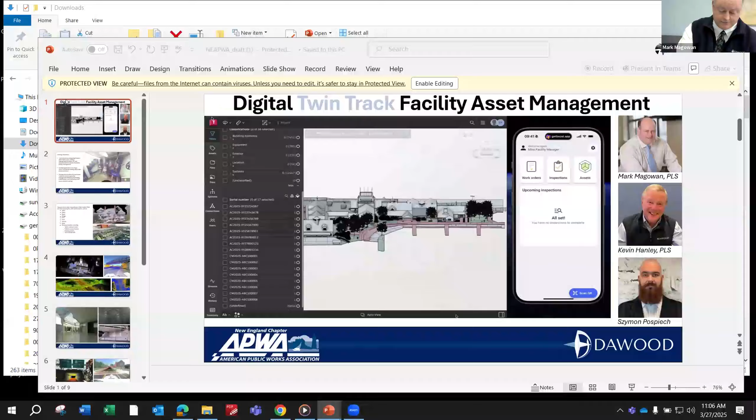Thanks a lot, guys. Yes, good morning. I am Mark Magowan from Dawood, and first off, we would like to thank the New England chapter of the APWA for allowing us to make this presentation. Just a quick biography of Dawood Engineering: Dawood Engineering was founded in 1992 and spans over 30 years of growth and achievements. Dawood is a multidisciplinary professional consulting firm specializing in surveying and mapping, GIS services, BIM, VDC services, site and civil structural engineering, environmental services, geotechnical engineering, and transportation, wastewater, and construction management. Our New England office is located in Braintree, Mass, and Dawood Europe is located in Poland.

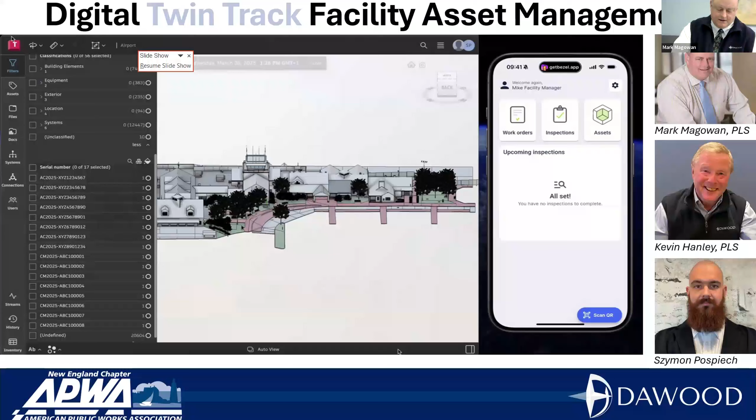This presentation will highlight use cases where facility digital twin through Dawood's native Twin Track mobile application can reduce inspection time by 90%. In a variety of markets, including New England wastewater facilities and transportation infrastructure, TwinTrack allows owners, plant managers, and process engineers to seamlessly monitor assets and improve decision-making. TwinTrack also provides public works personnel with access to technical documentation, operational guides, and warranty records of equipment using their mobile phone app. Elements are tagged with QR codes, enabling rapid information access.

This allows for data exchange between the mobile app and the digital twin using the Tandem API, making it the single source of truth. On-site engineers access information on the go during daily inspections and send inspection data to the digital twin. This helps management respond to events in real time and reduce incidents. Day-to-day facility users create and manage work orders remotely in the web portal and assign tasks to field staff working through the mobile app.

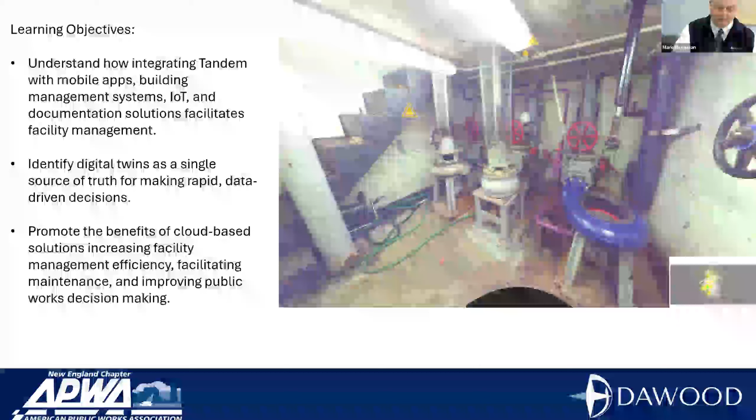The learning objectives of this presentation are to understand how integrating Tandem with mobile apps, building management systems, and documentation solutions facilitates facility management, identify digital twins as a single source of truth for making rapid, data-driven decisions, and to promote the benefits of cloud-based solutions, increasing facility management efficiency, facilitating maintenance, and improving public works decision-making.

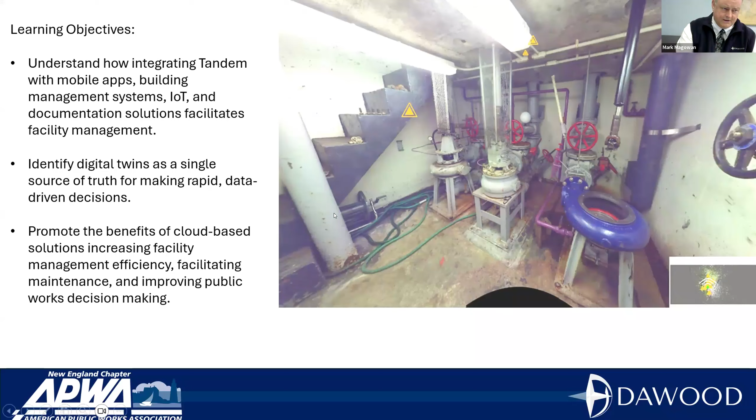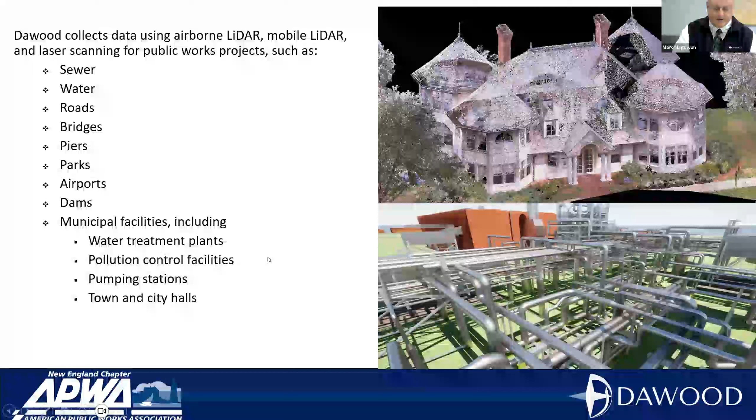Our methods of collecting data: Dawood collects data using airborne LiDAR, mobile LiDAR, and laser scanning for public works projects such as sewer, water, roads, bridges, piers, parks, airports, dams, and municipal facilities, including water treatment plants, pollution control facilities, pumping stations, and town and city halls.

Now this is a rare occurrence where an individual with 47 years experience is introducing another surveyor with 53 years of experience. That's a total of 100 years experience. So I'm handing this off to Kevin Hanley.

Thanks, Mark. It's hard to realize that college graduation was 53 years ago. And in those few short years, I've seen a lot of technology introduced to surveying and mapping. I've even been involved in scribing of assessors maps long ago.

But do you remember when CAD was introduced? We had the ability to draw lines between points. Remember when GPS was introduced? Huge, big receiver, long observation sessions. Computers back then, huge big boxes taking up desktops. And now your handheld smartphone can do all of that. And the mobile solution is the key to our TwinTrack solution.

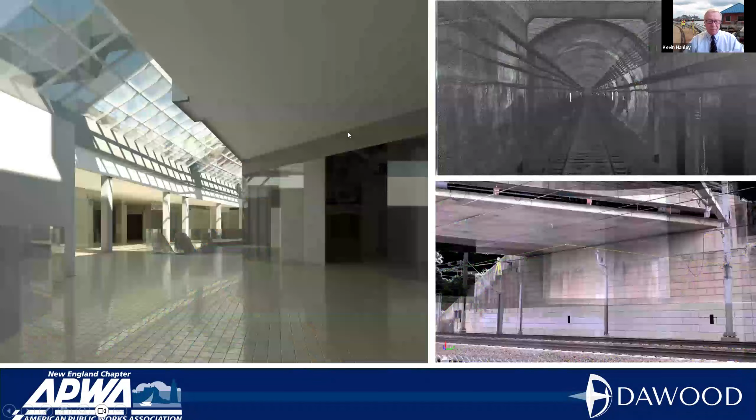So it all begins with points. Years ago, it was single points, drawing lines between them. Now it's millions of points that are collected with ease. With laser scanners and mobile LiDAR systems, we're collecting anywhere from 500,000 to 1 million points a second.

It allows us to do fly-throughs, video through the point cloud, video through colorized point clouds, so you can essentially do desktop inspections. And the ability to do colorized point clouds, the bottom right, this was a quote unquote simple survey.

We needed to locate tracks and the bridge abutments remotely without going on the railroad. So the picture you see is a colorized point cloud. So we extracted the rails and the abutment, but once the client saw these images, he needed more information. So we went from a simple survey to a 3D drawing of the bridge and the abutments.

And we provided clearances for the wires and the bridge to the rails. The image on the left is a 3D model, a Revit model of a supermarket in Poland. So it takes millions of points, colorized images, and creates these 3D models.

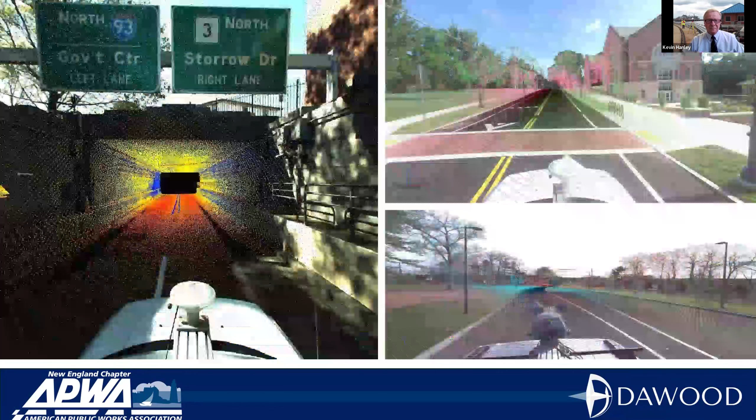So how do you track assets and their maintenance? What's tracked from a public works perspective? In these three simple images that contain the point cloud and the imagery, there's a number of items that you probably track, maintain, and assess the quality of throughout the course of each day.

Signs, the height of them, the location of them, the reflective quality of them, detectable warning strips or detectable warning pads at pedestrian crossings, and what condition they're in. Lights, lampposts, trees, signs.

How do you track them? Even this morning, driving into the office, the first intersection I came to, I noticed that the traffic light pole had been replaced and was taller than the other traffic light poles. How is that managed? How is that tracked? How does one know within the Public Works Department when it was installed, and the material, etc.?

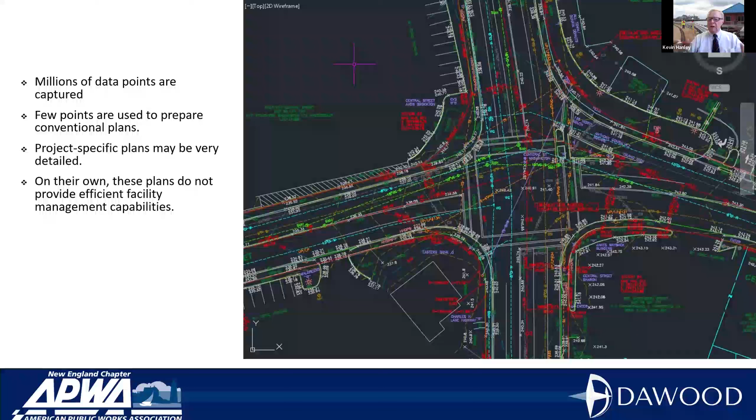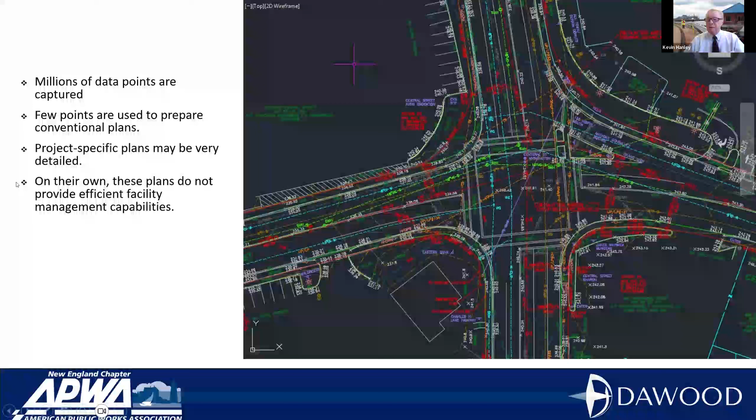So we collect millions of points, but few are generally used to prepare plans that engineers and public works officials use throughout each day. They're usually project-specific plans that may be very detailed, as you can see with the image on the right, but on their own, these plans do not provide efficient management capabilities.

So here we are with the technologies that are available today. We've gone from points to digital twins. We started with points and point codes, simple data about the point - the coordinates, the elevation, the description, and maybe even a reference number. Then we've gone to GIS, and then with scanning and LiDAR, we've jumped to the next phase of data gathering. We can do fly-throughs, 3D models, BIM models, and digital twins.

And the digital twin is a holistic view of a facility. It provides value-added solutions, and most importantly, it's geospatially referenced data. It provides cutting-edge facility management capability using twin-track data management.

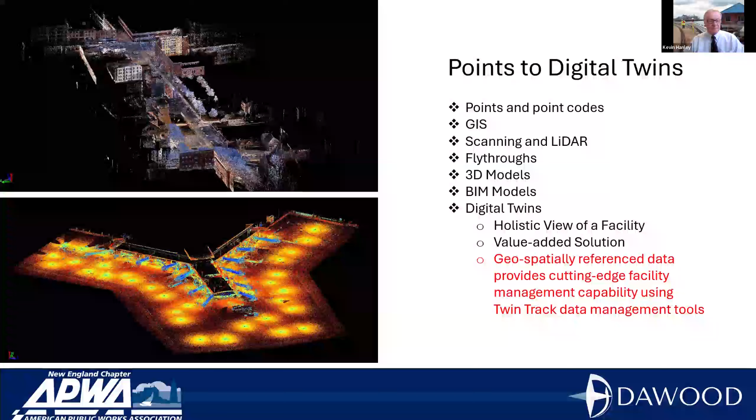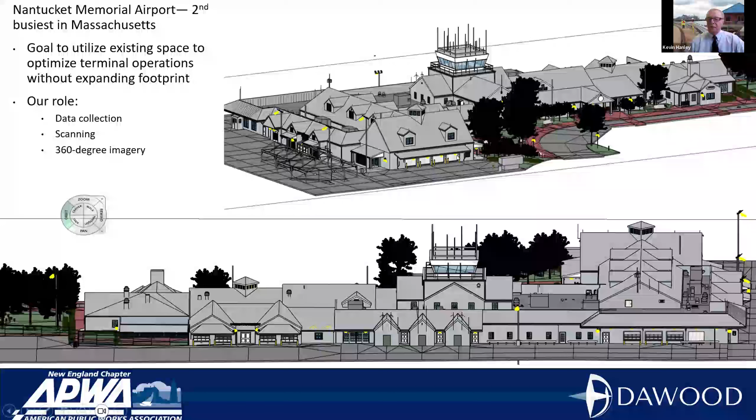So one of the projects that Szymon is going to concentrate on today is a typical municipal airport. And I'll hand it over to Szymon now to make his presentation on twin-track. Thank you, Kevin.

So today, let me explore a little bit of how digital twins are transforming facility management.

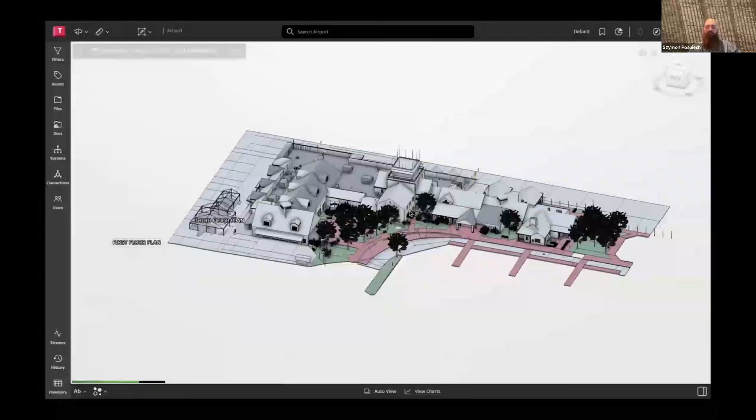As Kevin mentioned, it all starts with collecting data. Once the data is collected and we've got a BIM model, we can then import this BIM model into Autodesk Tandem software, which behaves as a host for our digital twin.

Let me tell you a little bit about what that digital twin really is. It is a dynamic virtual representation of an asset, process, or system. It's not just a static model. It's constantly updated with real-time data, enabling you to monitor, analyze, and optimize your assets.

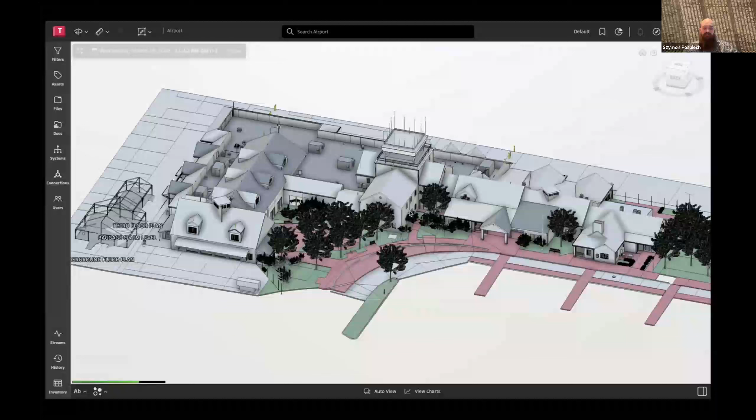In facility management, digital twins provide a centralized digital view of your facilities, allowing you to access critical information, streamline operations, and make data-driven decisions. They also integrate data from various sources, such as IoT sensors, inspections, work orders, to give you a holistic view of your facility.

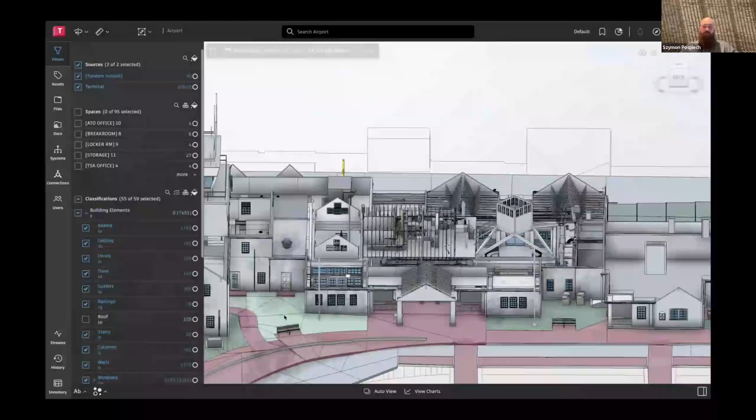In this example, I'll show you how easy it is to manage your facility. We can filter out any of the elements of the building to easily remove any plantings in front of it, if we need to access air conditioners or fuse boxes on the walls. We can filter out ceilings, roofs to preview the beams or preview the systems inside, like plumbing or HVAC equipment. And we've got access to all the assets found in a facility.

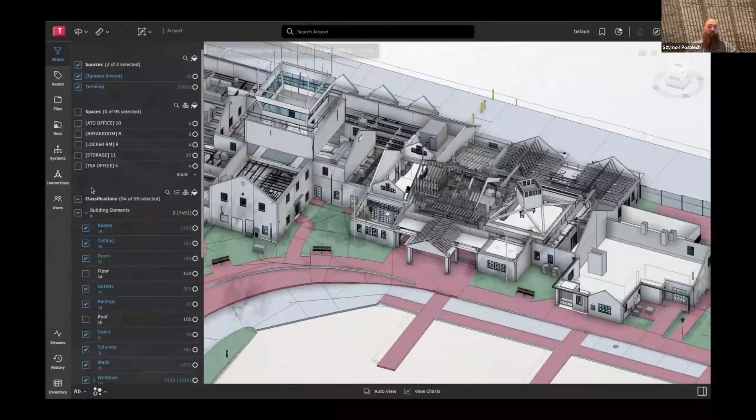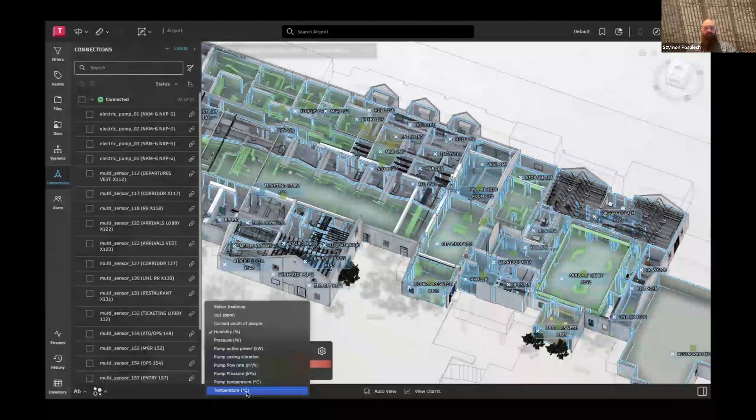We also got access to all the spaces in our facility, so we can preview each of the rooms, each of the spaces. And by having this real-time connection by the IoT sensors, we got access to a lot of measurements. We've got sensors feeding data about CO2 levels, count of people in the room, humidity, pressure, and temperature data, and we can easily visualize these values as heat maps in our facility.

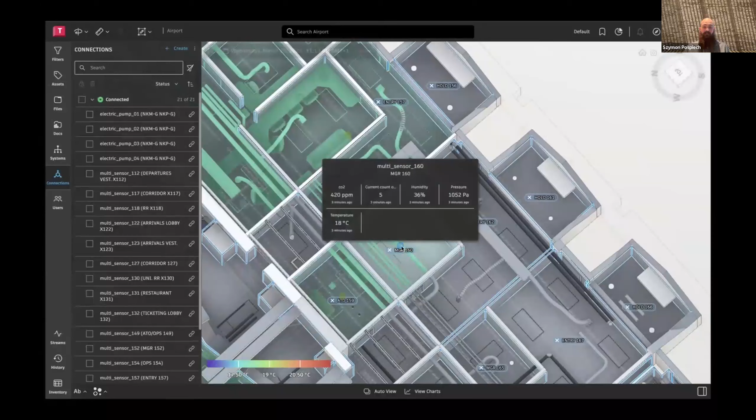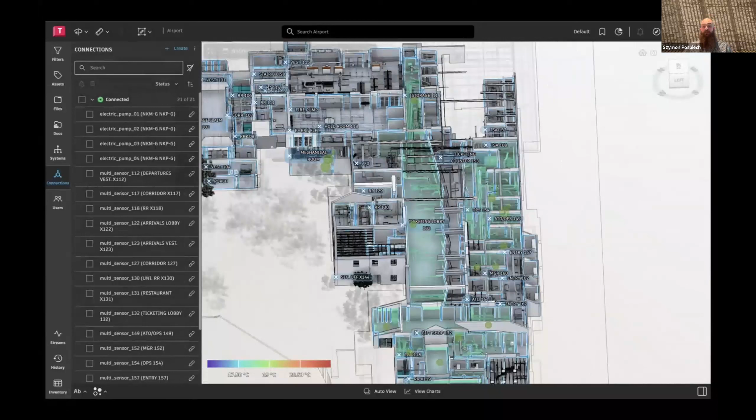If it is a bigger facility, we can easily preview it in real time on our desktop in a virtual environment. This way we can analyze how the temperature is flowing through the rooms, how many people are in each of the rooms, and we can make data-driven decisions and optimizations to reduce energy costs or optimize our facility for foot traffic, for example.

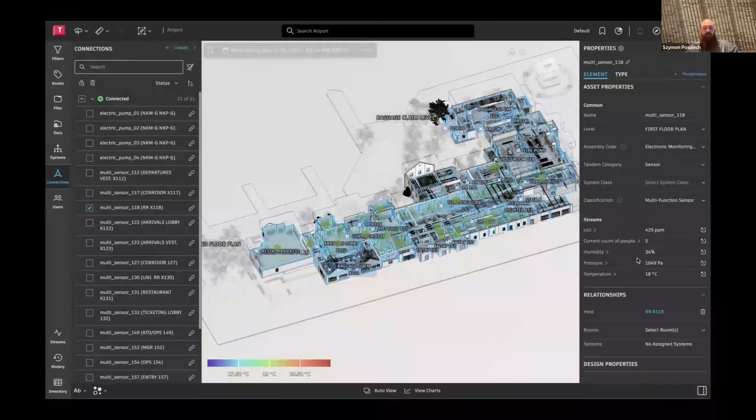Facility management comes with a unique set of challenges. For example, accessing accurate and up-to-date information about the assets can be time-consuming, especially in a large facility. Managing work orders often involves multiple stakeholders, which can lead to communication gaps or delays. And inspections, while critical for maintaining equipment, can be inefficient and prone to errors when done manually.

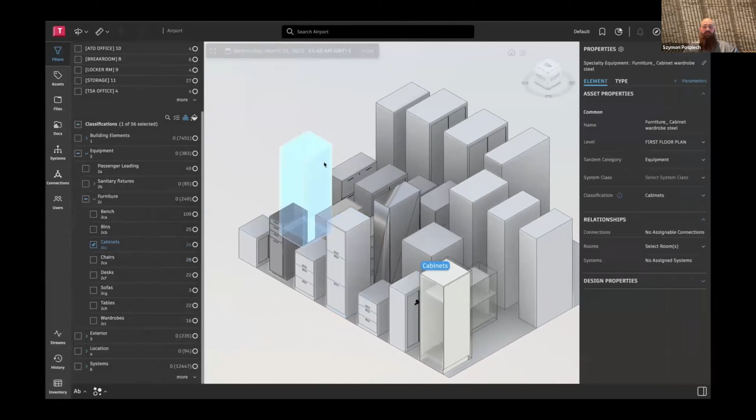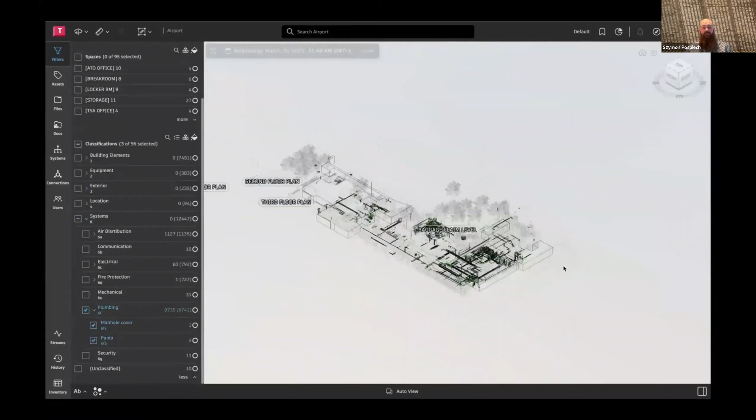Here we can see how easy it is to filter out furniture assets in our facility. We can cluster the cabinets to easier count them or access any information assigned against these elements. The digital twin technology addresses these challenges by providing a centralized platform where all asset-related data is stored and visualized. This allows facility managers to access information quickly, streamline workflows, and ensure accountability across teams.

In this example, we are trying to access pumps found in a machine room, and we want to see the information assigned against the pump. We can see by who it was installed, the manufacturer, serial numbers, when the warranty is expiring. We've got all the information about the upcoming inspections.

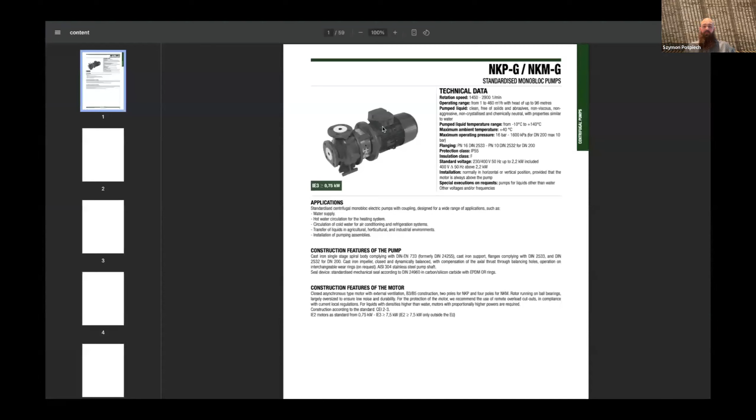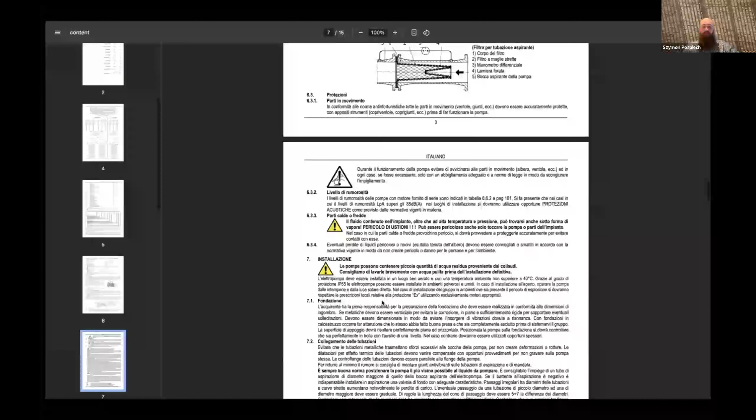We've got details about the open work order, but also we've got all documentation linked to it, so technical documents, operational guides, or a warranty card, which is really easy to retrieve by the facility management team. And if something is happening with the pump, they can easily preview the details.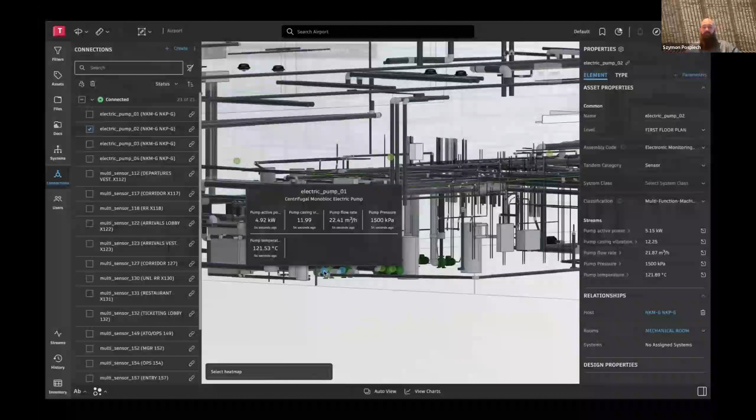Apart from the static data assigned against the elements, we've got also access to the real-time data incoming from the IoT sensors. So we can preview, for example, the active power of the pump, the casing vibration, the flow rate, the temperature or pressure. This allows us to monitor the performance of our assets in real time.

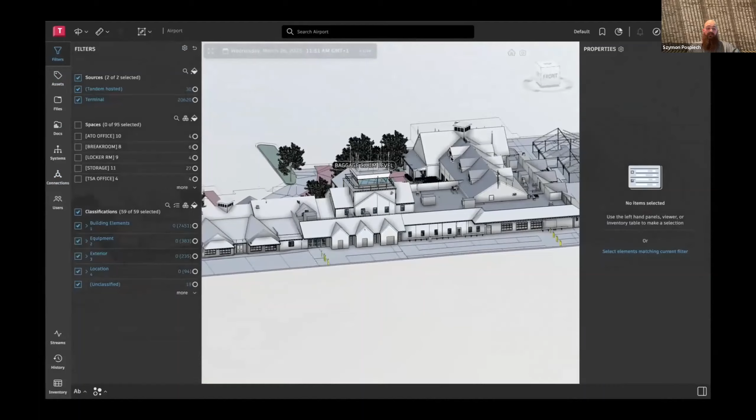In this presentation, I really want to focus on three main use cases: accessing asset information, managing work orders, and performing inspections. This hopefully will demonstrate how digital twins can simplify and improve these processes.

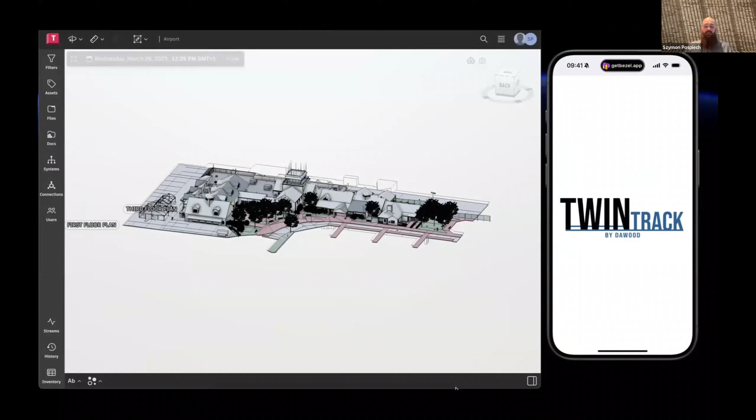On the left-hand side, we've got the digital twin in Autodesk Tandem, and on the right-hand side, we've got the TwinTrack application, which is a native mobile application integrated with a digital twin model.

So let's start off by accessing the asset information. Imagine you are a maintenance team member in a facility who needs to check details about a specific air conditioner unit in one of the rooms.

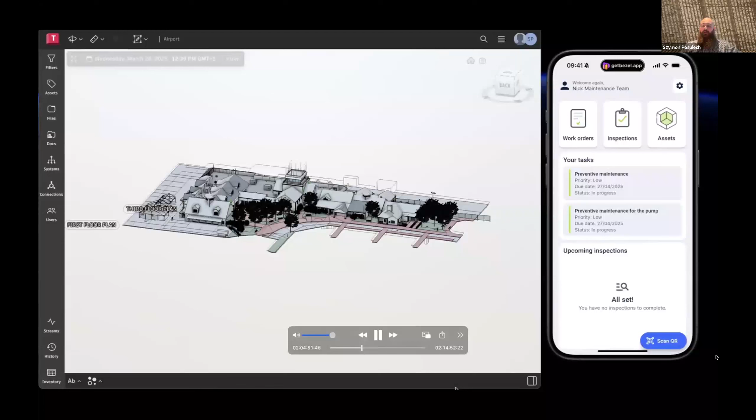By pressing scan QR code in the app, we're getting access to the camera, and we can scan the QR code located on the asset. By that, we are pulling all the information found in a digital twin while being on site through our mobile phone. So we've got access to all the documentation, operational, technical guides.

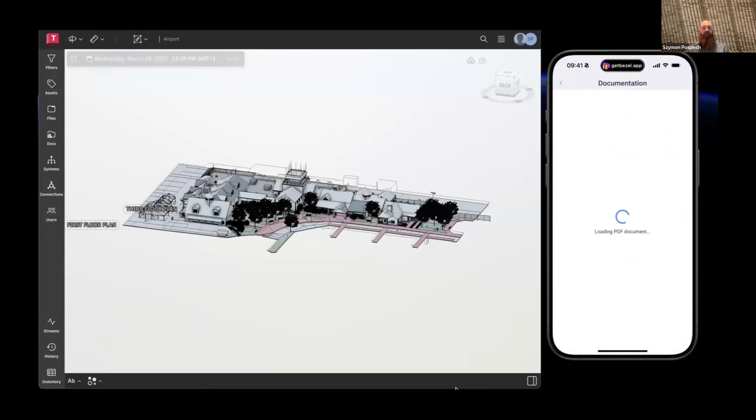We've got access to all the information which is also found in a digital twin, but also we've got access to inspections history. We can preview when the inspection was done, and we can also see the work orders.

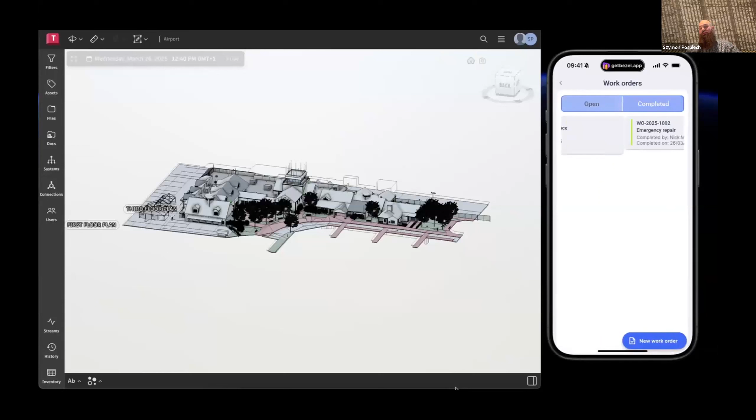We can preview the history of the work orders, check the tasks and what was done with them in the past, and see if there is an open work order assigned against the asset. And we can preview all this information through the mobile phone.

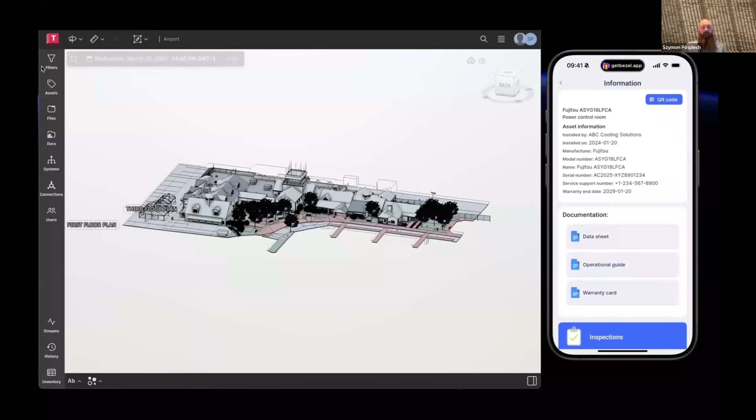I also want to show you that all this information available on a mobile phone is being streamlined from the digital twin, which behaves as a centralized repository for all this information.

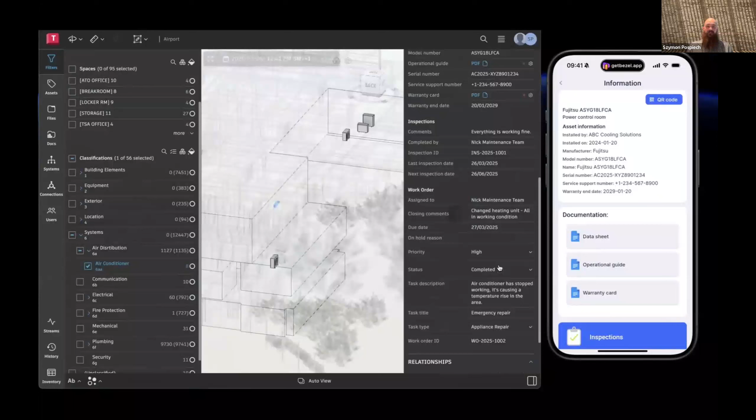So when the facility management team wants to update any data in a digital twin, they can easily navigate to the same asset, located in the same room but in a virtual replica, and update these details through the digital twin interface. Once they upload new technical documents or a new supplier warranty card, this information is accessible through the mobile application by the on-site staff.

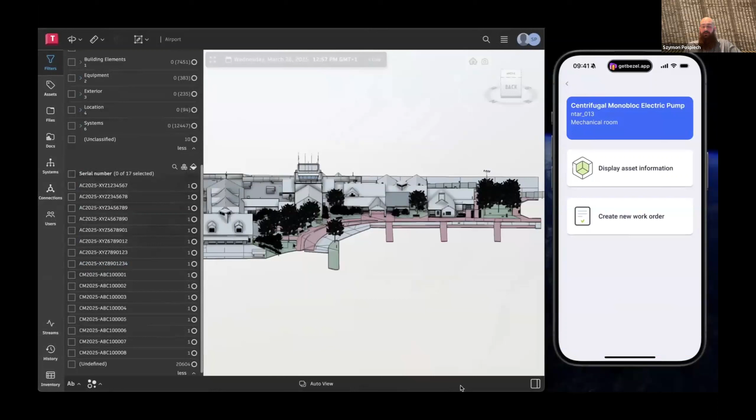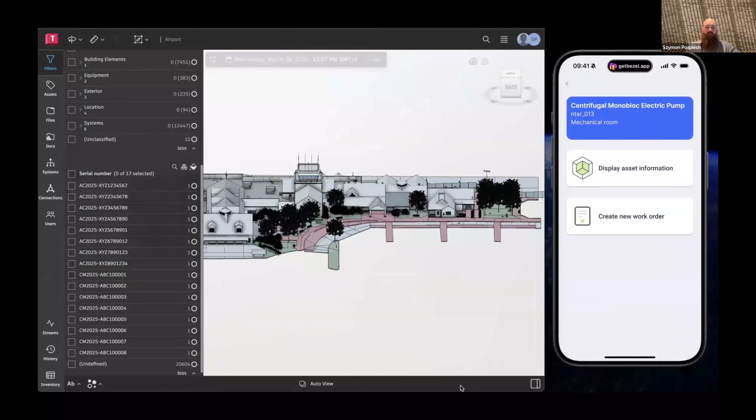Now let's move into the work orders process. Let's imagine you are identifying an issue with a pump in the mechanical room, and the process is the same as for accessing asset information. We scan the QR code located on the pump, which pulls up the information about the pump on a mobile phone, and we can create a work order.

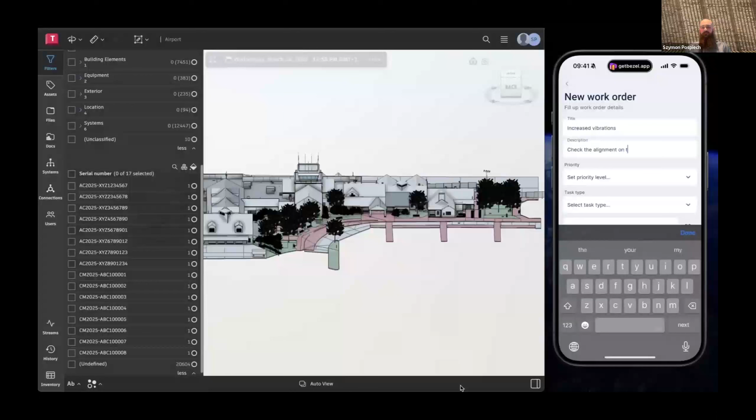Let's say we identified increased vibration on the casing of our pump. We can add a title and a description of the work order to make it more informative, set the priority of the task, specify the task type to allow easier grouping and searching later on, and specify a due date for this work order.

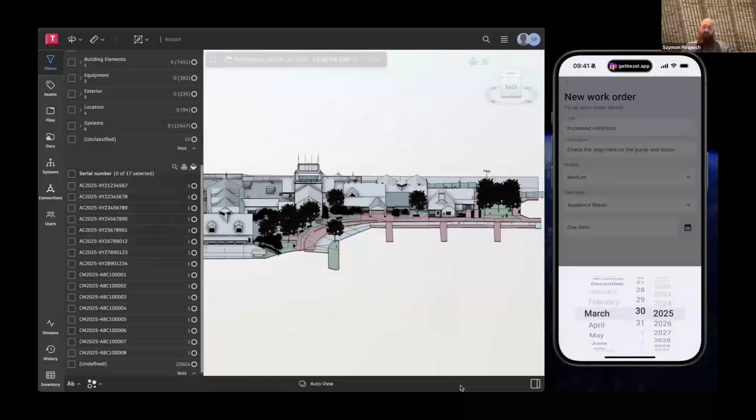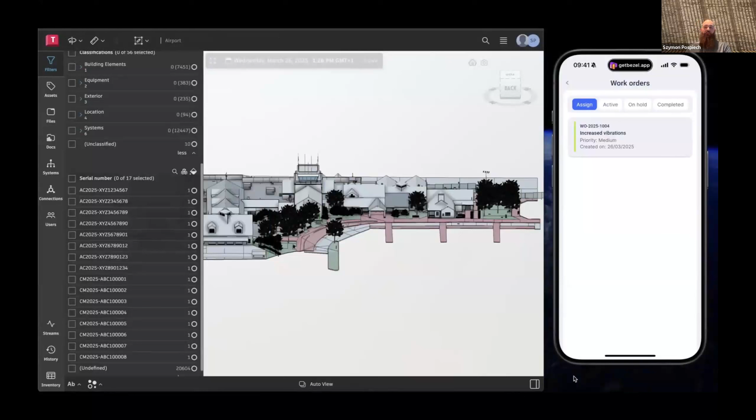When it is submitted, we get a trace of it in the application, and the facility manager also gets a notification with all the details we just supplied. They can log in and preview all the work orders for their facility, see the history, see the completed, active, and on-hold ones, and action the ones pending to be assigned.

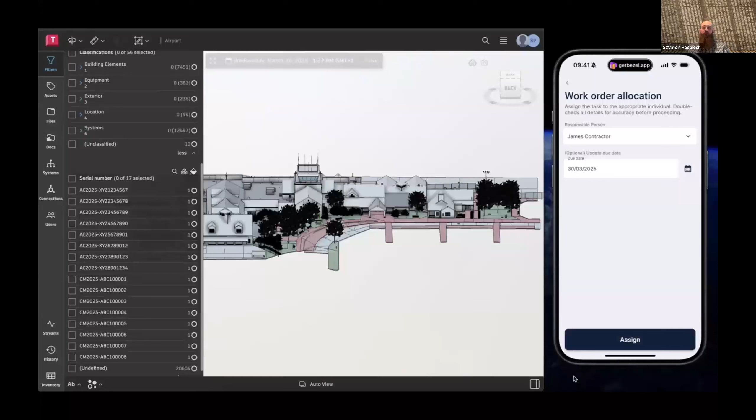Once they preview the details, they can allocate the task to the on-site facility maintenance team or to third-party contractors. If they select a third-party contractor, we limit their access to the data, only giving them access to the work order details and the asset to which this work order relates. This way we ensure data security.

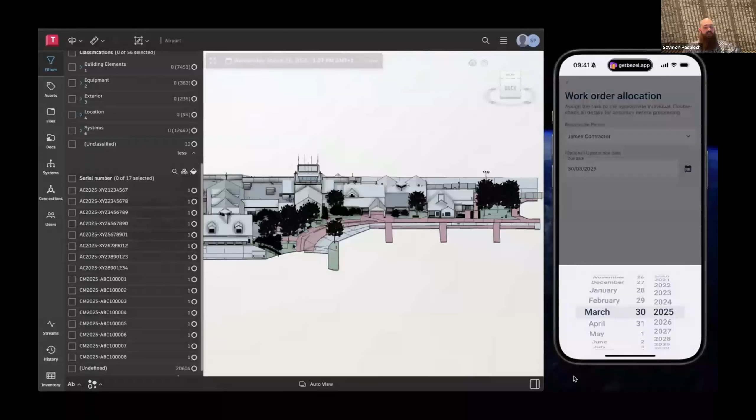The facility manager can also update the work order details and due date and assign the task. At this point, the contractor gets a notification that a new work order was assigned to them.

But we can also preview in the digital twin that this information was assigned against the pump in the mechanical room. So we get all this information stored in our centralized repository, in our model.

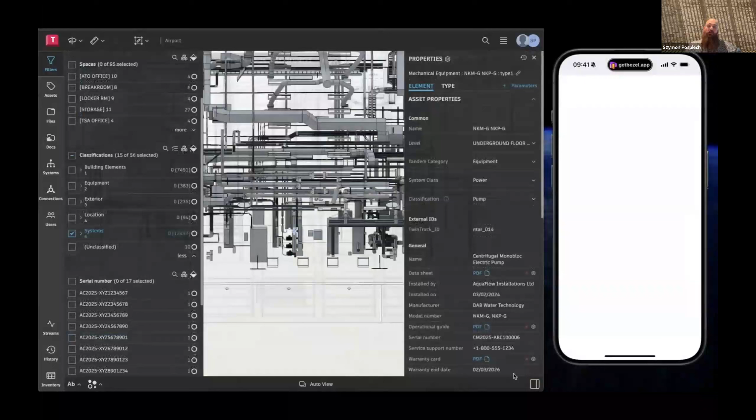So when the contractor goes into the application and navigates to the assigned work order, he can preview the exact information just for this one asset and access any technical documentation if needed, or operational guides needed for him to perform the repair.

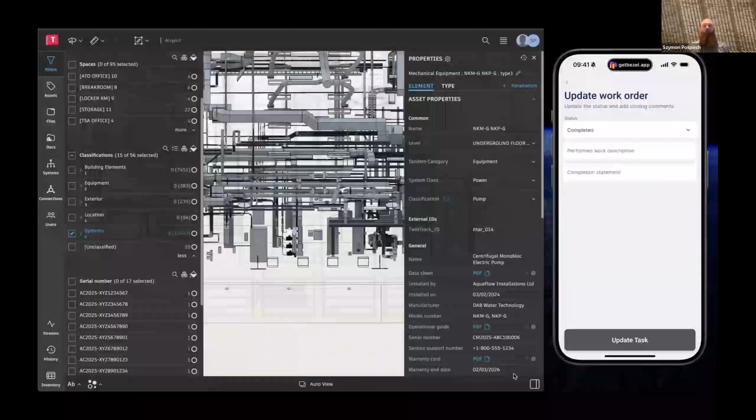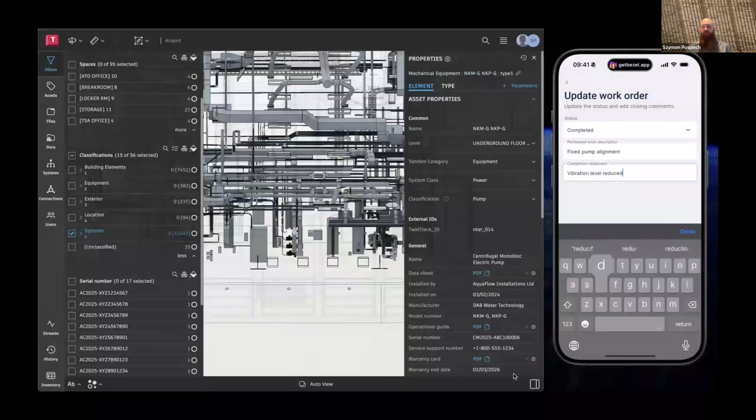Once the work is done, they just need to specify what kind of work was performed during the repair and add the completion statement. This allows both the requester of the work order and the facility manager to stay up to date with all the information about what was done to one of our assets. When the task is updated, they also get a notification, keeping them in the loop with all work progressing in their facility.

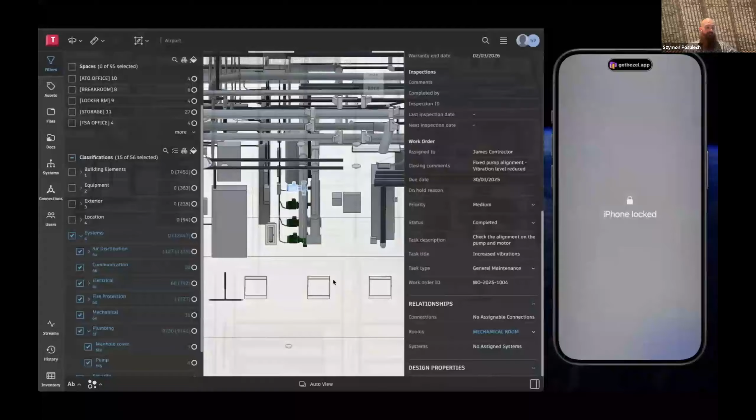The information is also updated in the digital twin, allowing them to trace any work performed on site. This provides a holistic view of their facility and also gives them the chance to track recurring issues, identify patterns, or optimize maintenance strategies.

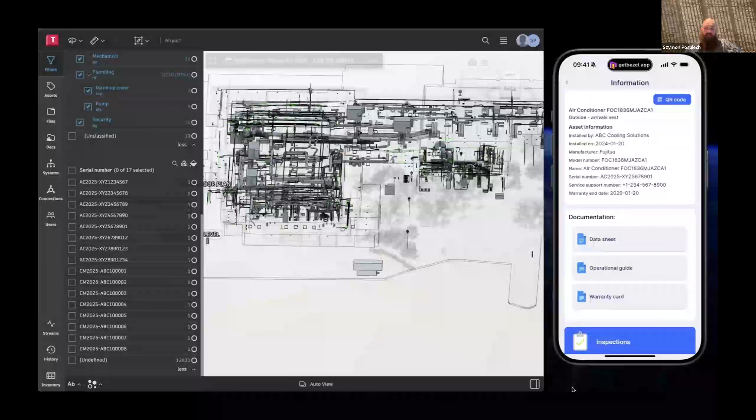Finally, let's move on to quick inspections, which can be streamlined using digital twin technology. Inspections are a critical part of facility management, allowing you to regularly check your equipment and identify potential issues early on. To schedule an inspection, the person on site can navigate to inspections.

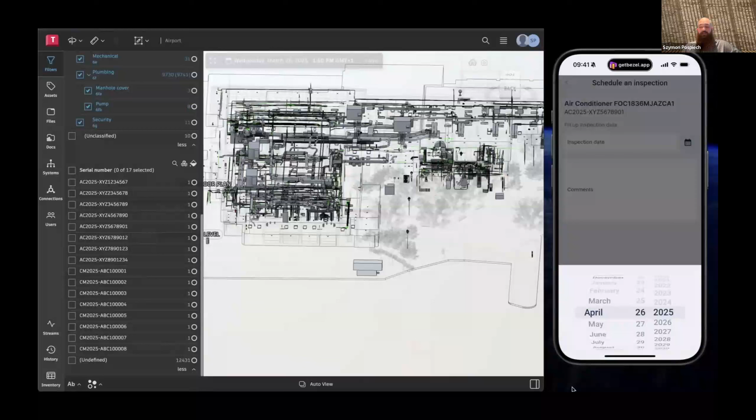They are able to preview the history of previous inspections, and they can schedule a new one by supplying a date for the inspection and adding any necessary comments. For this example, it is just a regular checkup.

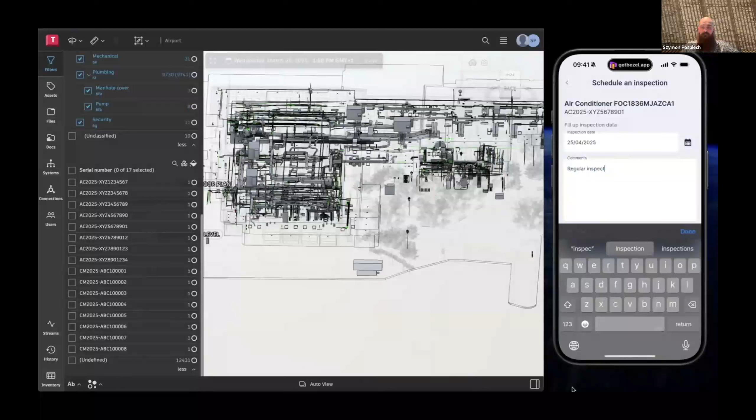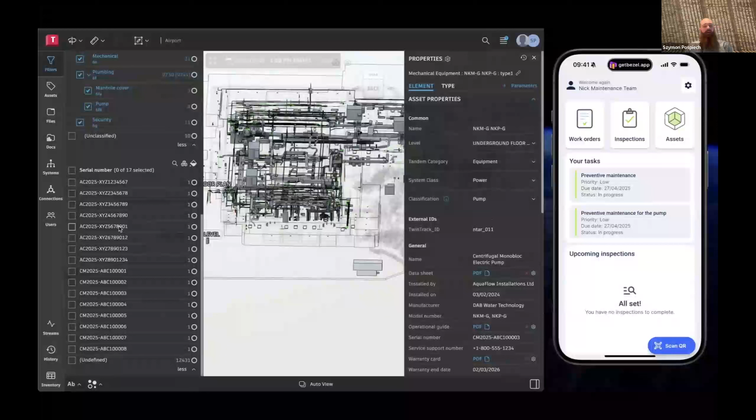Once they schedule the inspection, the details of it are also submitted against the element in the digital twin. So by searching the element through the serial number in this example, we can see that the information about the upcoming inspection will appear against the asset.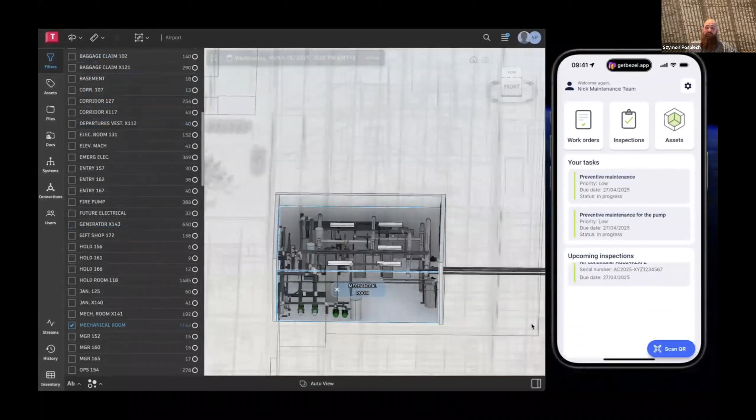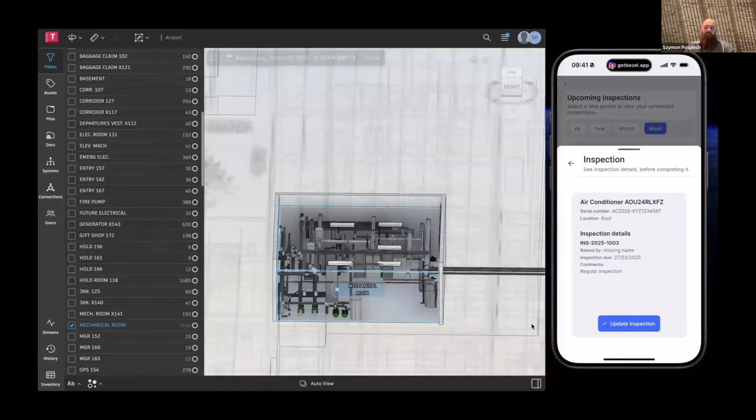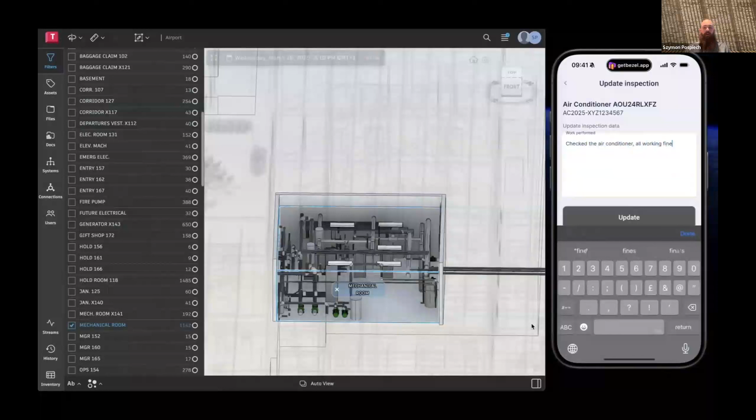Once the inspection is scheduled, the maintenance and facility management team can see the whole list of upcoming inspections for a year, an upcoming month, or a week. Once the inspection is due for the element, they can perform it, providing the inspection details and the work performed, which is also transferred to a digital twin so the facility manager is kept in the loop. They can schedule a new one if needed, or just navigate back to the home screen.

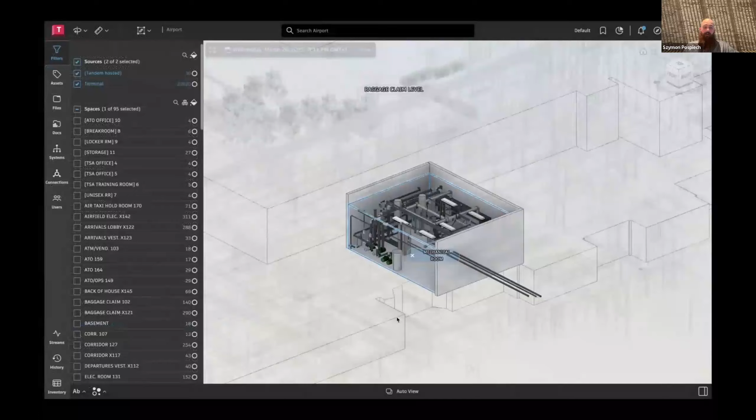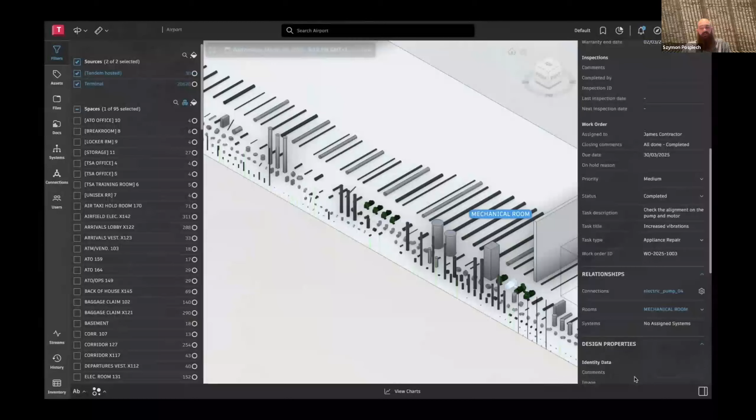This allows all the information to be kept in a digital twin, and it also speeds up the time needed for performing inspections and work orders. Everything is centralized in a digital twin, and the digital twin changes how we manage our facilities. It helps us improve paper-based processes and data collection by giving us a virtual repository to store all the static and dynamic data about our assets.

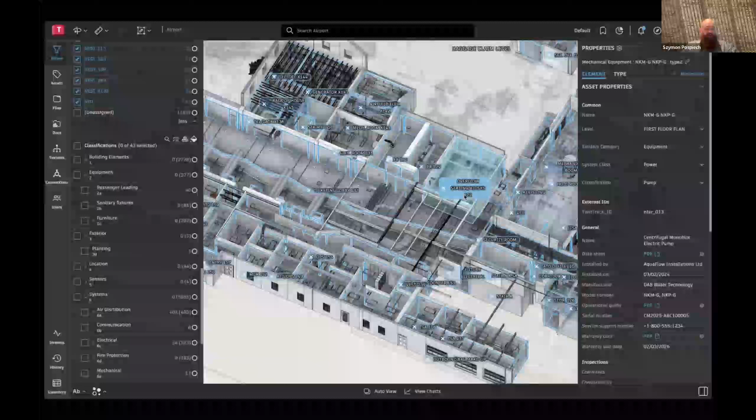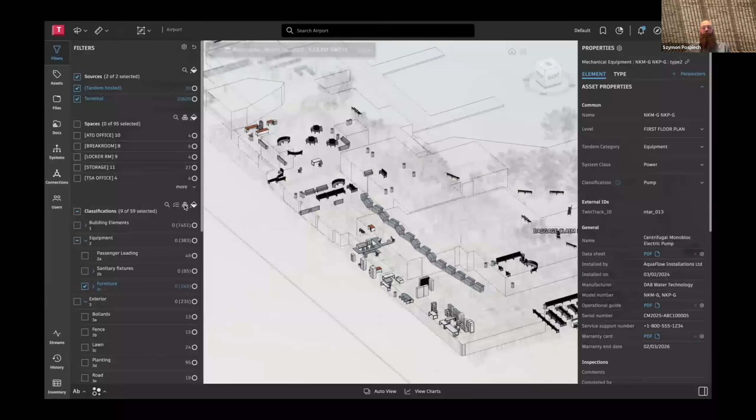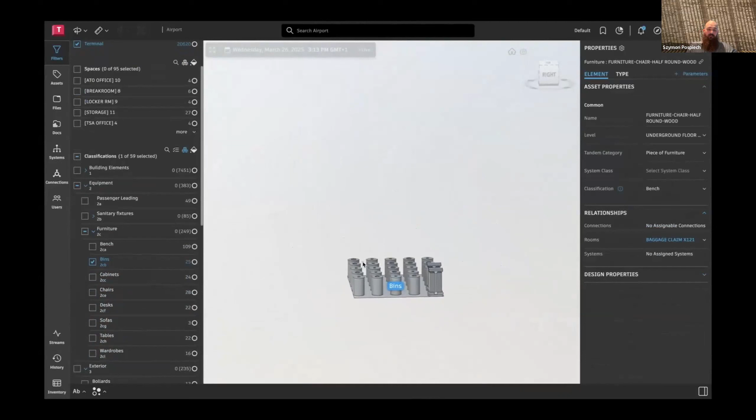I want to give you two examples that quite often come up during our implementations. First, we identified that over half of the repairs done to assets in our facility are paid for when they should be covered under warranty. The problem is with documentation, because it's often lost—warranty cards get misplaced between departments, scattered across multiple cloud-based drives, or kept only as paper documents that are hard to retrieve. By assigning these warranty cards to elements in our digital twin, we can simply press on the element and retrieve the document when needed.

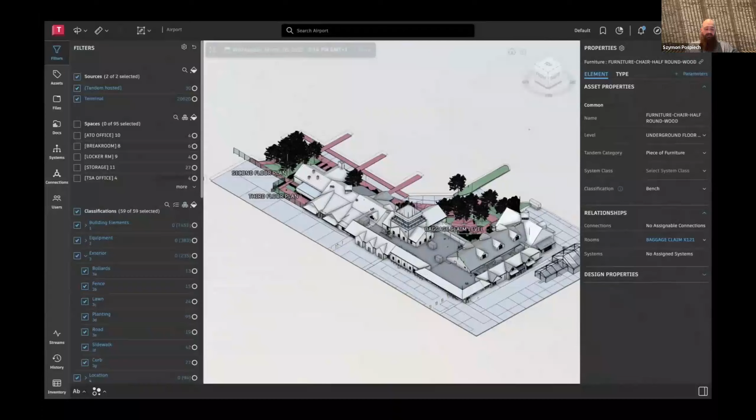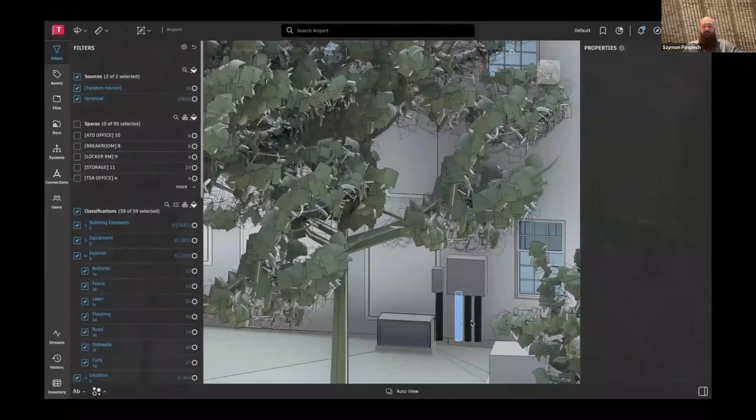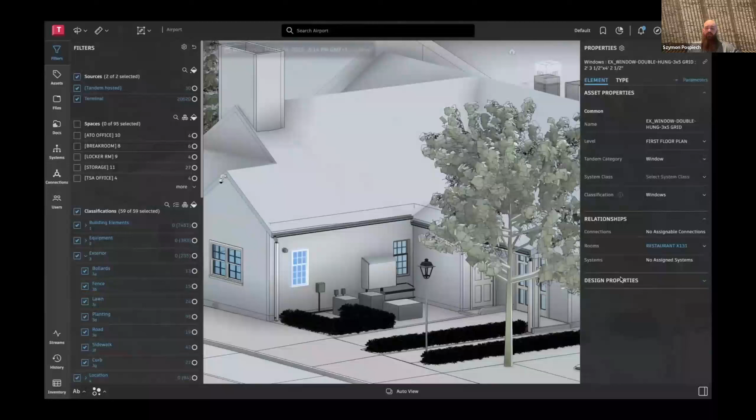The second example: based on the airport, when there's a small renovation project and we need to repaint just one wall of a corridor, it's usually hard to identify what kind of paint or shade was used. We end up repainting a whole corridor, multiple rooms, or even levels of the facility instead of just that one wall—wasting a lot of money on labor. This information can easily be assigned to the wall element in our digital twin.

By having this information, we are saving costs in the long run. So thank you very much for your attention.

If you've got any questions about our solutions and about digital twins, I think we can move to that part now. Does anyone have any questions for these gentlemen? We have a quiet group today. Is there anything? Yeah, Mark, go ahead. Anything else, Mark or Kevin, that you wanted to add in?

The main point is that the technologies are there and are being used to create maps and surveys. But those maps and surveys created from laser scanners, mobile LiDAR systems, and aerial LiDAR systems have a wealth of information that can be mined to develop additional applications within a municipality. The simple thing Szymon mentioned—the shade of paint on a wall—translates into other aspects of daily public works life. Look at the assets along your public ways: how are they managed, down to maybe a bike rack? But within buildings, how do you manage the furniture, the desks, or the cabinets, in addition to the major functioning elements like HVAC systems and plumbing? So it's the technology, and in many cases the data is already there—it's a matter of growing the information base you can derive from existing data.